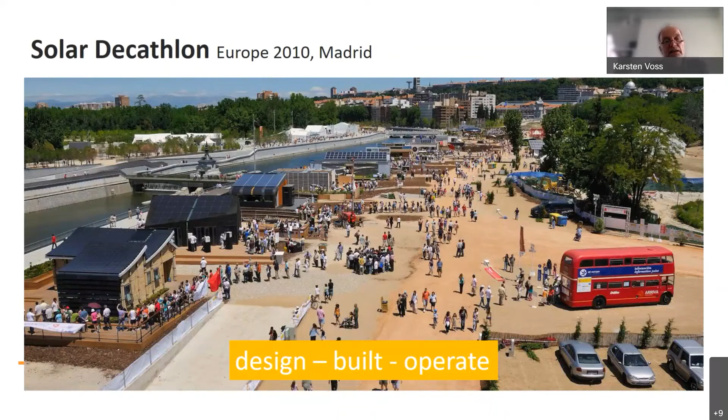Up to now, about 22 of these competitions have been done. Katja already mentioned that the next one is the edition here in Germany for the first time, in Wuppertal, the university where I work. It takes place this week, starting on Friday. We will have many visitors seeing the buildings and the students on the site.

In general, solar decathlon means a building competition with 10 contests. They are not always exactly the same, and the amount of points you can receive is not always exactly the same either, but in general it's the same concept, and the teams having the highest score at the end across all contests will win the competition.

From the perspective of research, the focus is on three of these contests, which are monitored: the energy performance of these buildings, the house functioning, and the comfort. But generally, three contests are monitored.

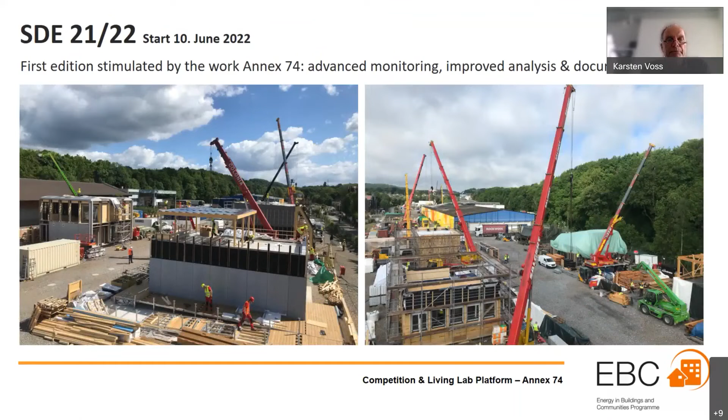So basically, I will focus on the topic of research, and Sergio will talk about education and communication.

There is potential within these competitions for many aspects of research, such as architecture, construction, energy engineering, HVAC equipment, or controls. For this presentation, I'll just select two: construction and energy engineering.

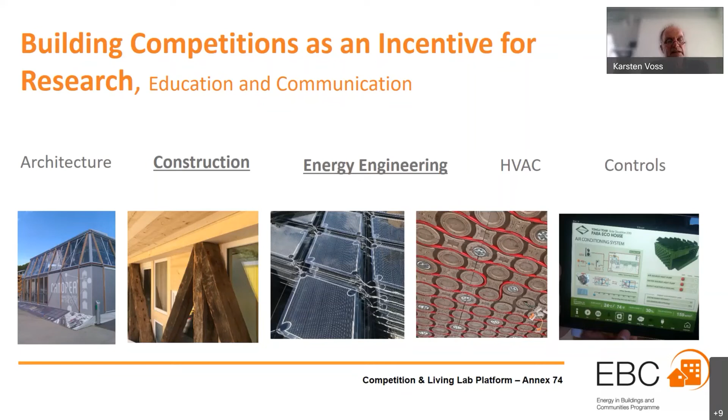For example, the buildings, due to the small amount of time to construct them on site, are all prefabricated, using different levels of prefabrication. We also see in the European building market that the tendency for prefabrication is rising, with more and more buildings having a high level of prefabrication, starting from buildings with prefabricated elements or even using prefabricated space modules. Therefore, this competition is also about designing, testing, and inspiring the market with these kinds of buildings.

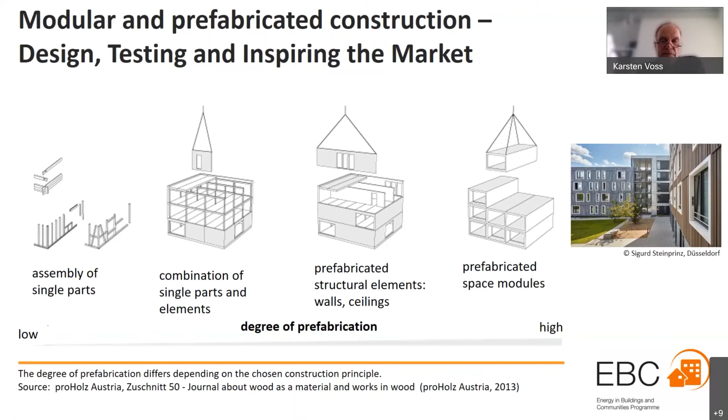If you take a look at past competitions and see the different approaches here, building by elements, building by modules, or hybrid constructions, you can see that teams use different approaches. One very important approach was the LumenHAUS from Virginia Tech in 2010. It was a winner of that competition, also because the level of prefabrication was enormous.

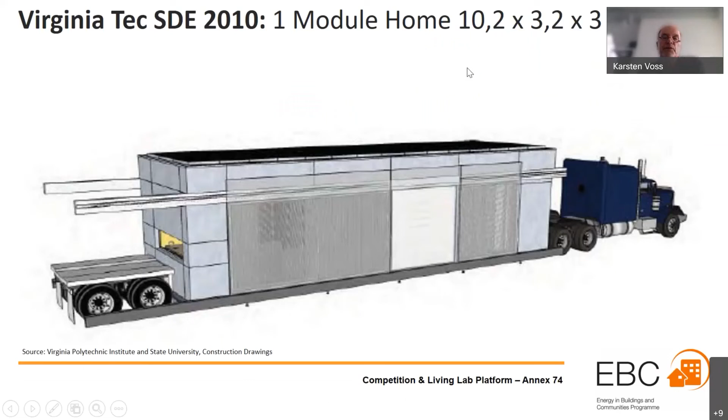It was transported to the site with one truck. One module was 10.2 by 3.2 by 3 meters, while all the other buildings used much more modules or even more elements. Typical number of trucks when teams set up these kinds of houses is something like 5 to 10 trucks, and this house comes with one truck and was almost ready and placed on the site. So we can learn how pre-construction can be successfully done and how it influences the performance of buildings.

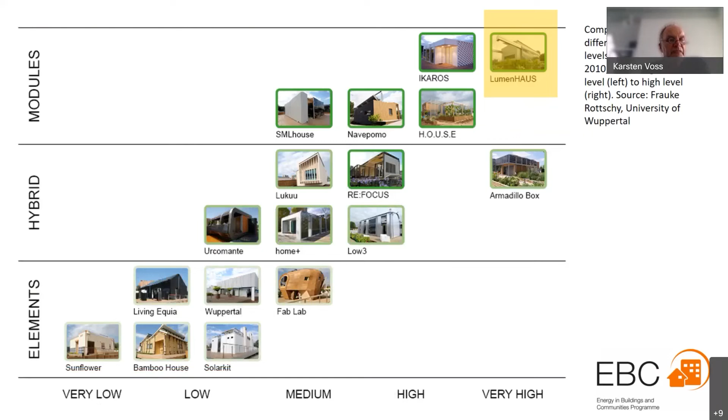If you look at the strategies used in past competitions from 2010 to 2019, you can see it's not the case that more and more buildings use module construction. It's going down, or going up a bit, with most of them using elements. This has to do mainly with limitations in the architectural design of these buildings when you build with modules. This is something to overcome if we want to be successful in future with modular buildings in the market, to overcome the design limitations and look for more options, and then we can start to use more module-based designs.

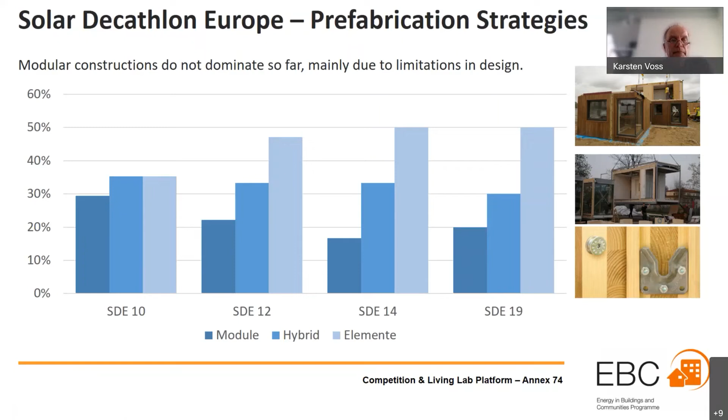Another issue of research in these competitions is, of course, the energy engineering and energy balance of these houses. All are designed for net zero energy or even net positive energy, and all use electricity as the only energy carrier. This isn't 100% representative of the market, because we have different energy carriers in different houses, especially in urban situations—district heating, cooling, and things like that. But for the limitation of a common event on a common site, electricity is the only energy source.

We have done a thorough review of energy engineering in past competitions. It was published last autumn in Energy and Buildings, and you can download it as an open source publication on the Energy and Buildings website.

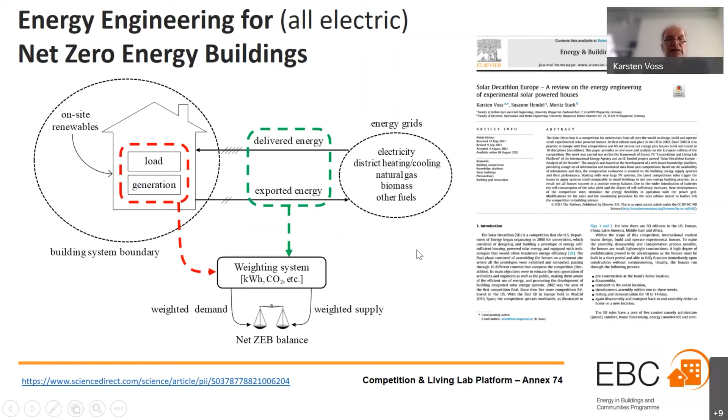Just to explain how energy performance is analyzed in these competitions, I can show you an example on the energy intensity of the different houses. Houses are given with their abbreviations, and here is the average of all houses for the competition in Dubai, Middle East in 2018, and here for the one in Europe, in France in 2014. What you can pick from this figure is that due to the different locations, the energy intensity is quite different, namely with regards to HVAC installations—here in Dubai, of course, for cooling, and in France, for a competition in June, there's not much cooling needed. But on the other hand, we also need energy for appliances, which is also a bit different between the competition in Dubai and the one in France.

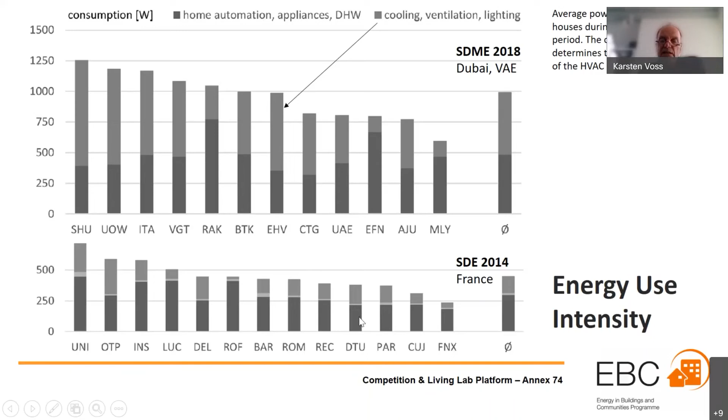Solar systems are mandatory in this competition, namely the PV installations. From the history of the competition, you can see from European editions in 2010 to 2019, the installed power per living area is decreasing. This has to do with the fact that in the early times of the competition, it should more address solar energy utilization in buildings and put this in front. Now it's more addressing the overall energy balance with increased efficiency and trying to overcome energy needs by solar systems. That means the organizers of the competitions have limited the amount of PV installed on these buildings, and currently it's something like 30 to 40 watts per square meter. This is somewhat similar to typical residential applications you find, for example, in Germany in residential buildings built according to the standard of net zero energy positive buildings.

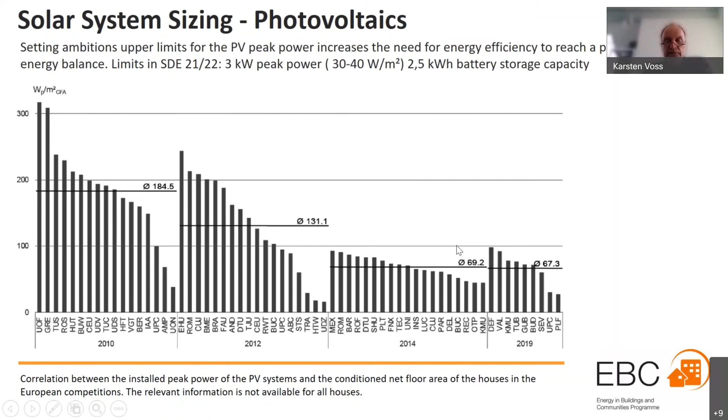I already mentioned that these houses should have a positive energy balance, and you can see this in the competition here in 2010 in Madrid—the relation between consumption and generation over the competition period of about 2 weeks. You can see that was more or less an easy job in Madrid at that time because of the large size of the PV systems. And you can see here in Versailles in 2014, because of limitations on the size of the PV system, not all houses were successful. Here you can see some which have not been successful.

Also, a new topic arises with an advanced monitoring approach: the balance between feed-in and consumption, allowing you to also analyze the self-consumption of these buildings. This also shows that the monitoring approach for these competitions was not always the same. It has developed over time, and the focus has also shifted a bit.

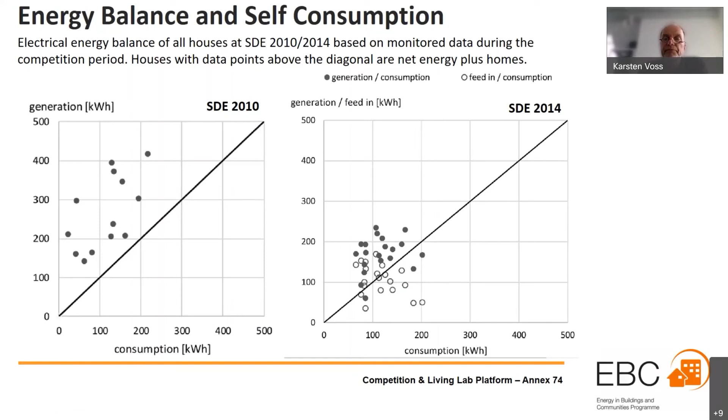Of course, solar systems are very interesting in terms of pilot applications. Here you can see some pictures I took last week in Wuppertal on the construction site. We see many buildings using hybrid solar systems, PVT, photovoltaic thermal combinations. We see new approaches like PV tubes, or design solutions with a copper roof, a ready-made copper roof for a building with copper-colored PVT systems. So there are many things like this to see when you visit a Solar Decathlon.

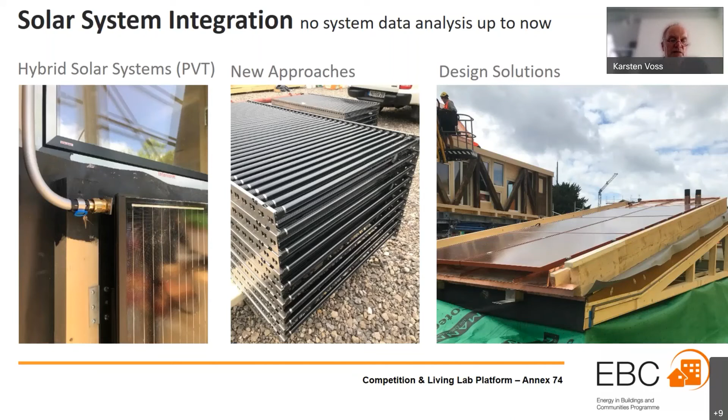The problem is that up to now there was no system analysis possible based on monitored data. This is always a question of how much money you can spend for monitoring for two weeks in such a competition. It's also something which has developed over time, but it really has limitations on what you can measure when buildings are only placed for two weeks.

From this perspective, there are some conclusions and outlooks based on what we have done in the Annex 74. We found out that we need a more sophisticated and systematic monitoring approach and information collection from the competitions to allow for post-competition research. A platform was developed within the Annex, and hopefully this platform now allows better structuring of the information received from the competitions. On the right side, you see a picture of a typical Excel page of such a platform, and hopefully the information is now better structured for post-competition analysis.

Also, based on the Annex 74 research, we introduced new contests into the competition. For example, just this week, we started sequences for co-heating tests of the buildings. Next week, we will also start with performance ratio measurement of the PV system, and we will make a deeper look into building-grid interaction. So this was a direct outcome of the work with colleagues in the Annex, discussing research possibilities.

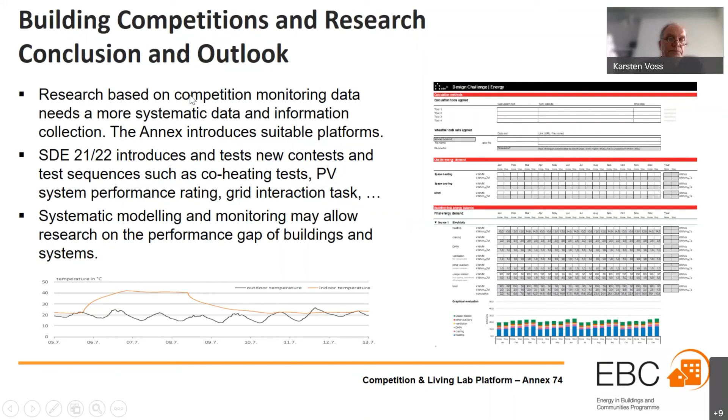Research in the competition doesn't mean everything has to take place in these two weeks. We found out that many teams start research when the buildings are back home. This example is one from our contribution in 2010 in Madrid. We operated this house as a residential building back in Wuppertal, and you can see here the energy consumption and generation over a period of one year of operation in Wuppertal. Like us in Wuppertal, many teams use these houses when transported back to campus or other test sites.

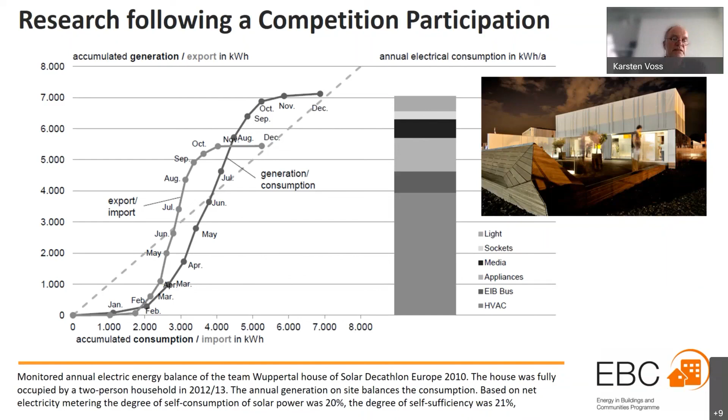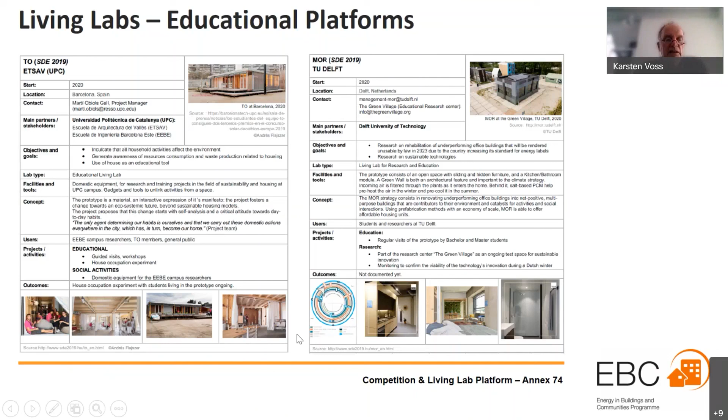This will also be available on the webpage, and is under review right now. What we also have done in the Annex is take a look into other tasks and annexes running, making small topical papers about the outcomes and making it useful for future student teams in such competitions. This is also collected into a focus report, which we call topical papers, and here you see the different topics we addressed. This information is available, or will be, on the Annex webpage.